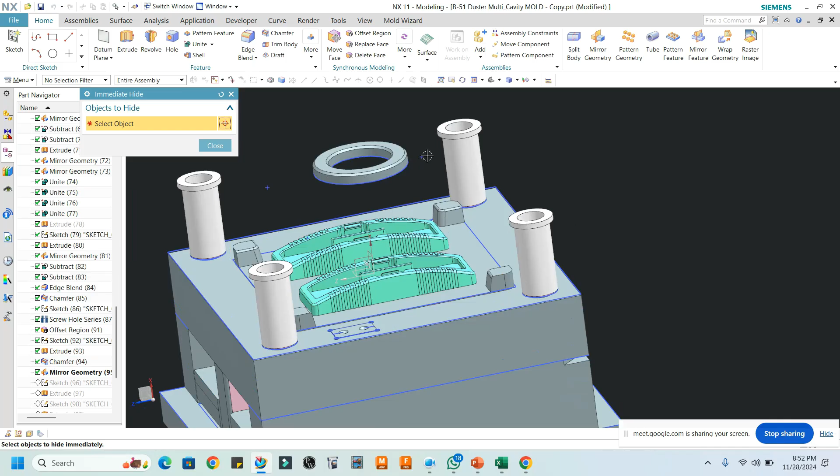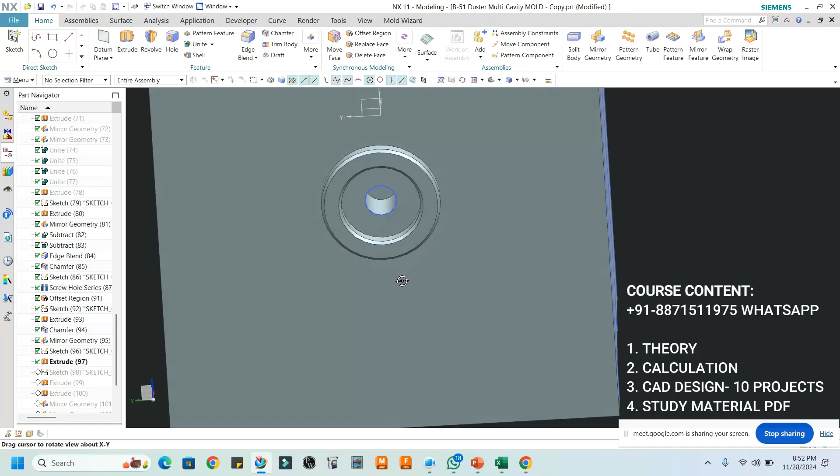To align the nozzle of the machine with the sprue bush, right? Okay. And now what is this? At the back side I'm using a locating ring again, and here this is the center hole. So what is this? Tell me.

Tell me. Which one, sir? This. Backplate. Okay, so here this is the back plate, I know, but I am asking what is the purpose of this hole? So basically there is a shaft here, right? So this shaft will be attached with this back plate. So this shaft is responsible to provide the force to this plate, right?

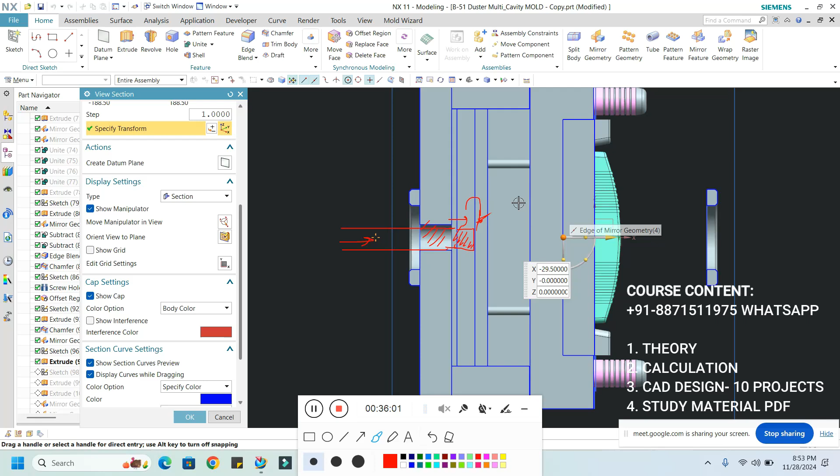And these two plates are responsible to eject the component, right? Already we provided the block, right? Both sides. So why do we need one at the center? One minute. Where is the block? Both ends. Yeah. This is providing the proper motion to the ejector grid.

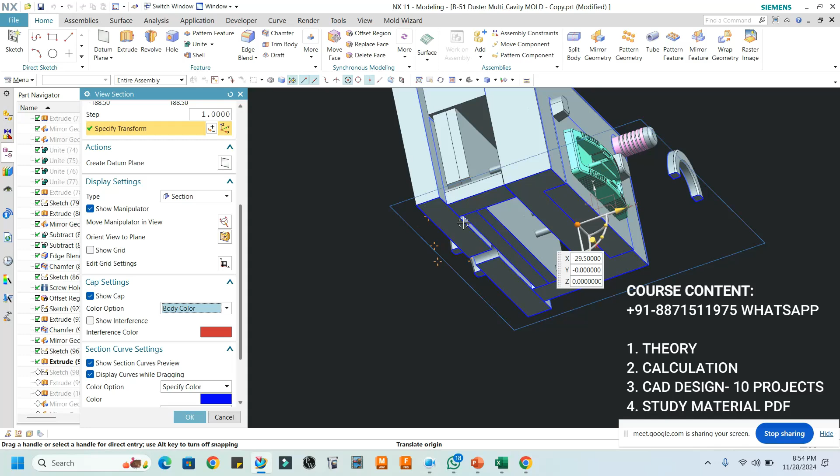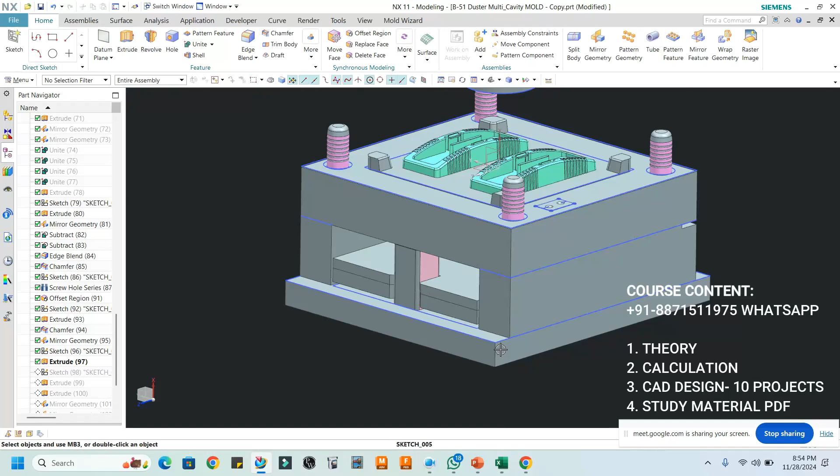See, there should not be deflection in this, because these two plates require support, right? That's why it is nothing but a support block. Okay, understood. So basically there is a fitment between this and this, which is H7 and j6, right? And this is the hole for the ejector, you can say the ejector rod.

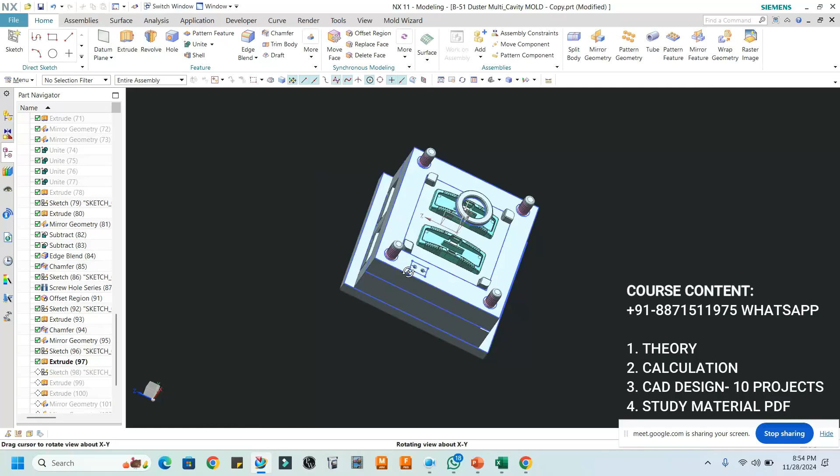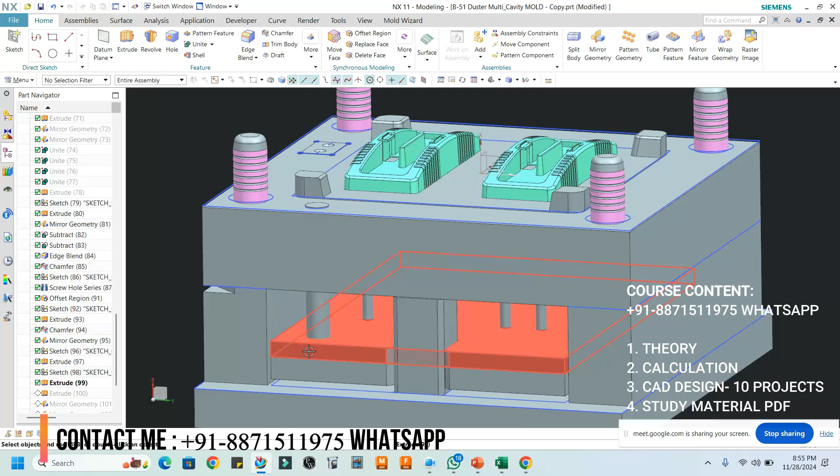So the ejector rod is connected with the ejector grid, and the ejector rod is part of the injection molding machine, understood? Yes, sir. Okay, now again tell me, what is this? Another pin, which is connected with the ejector grid, it also has a collar.

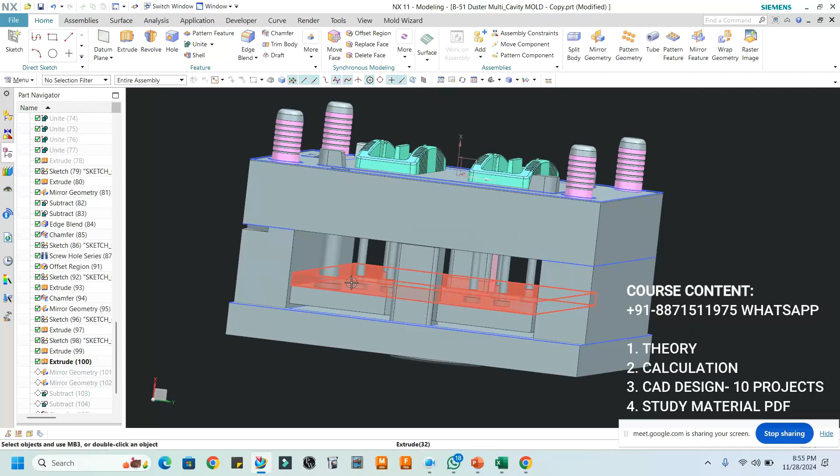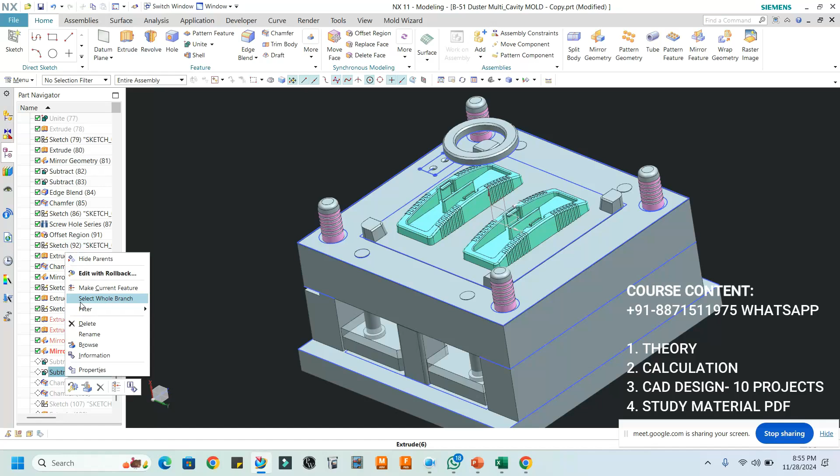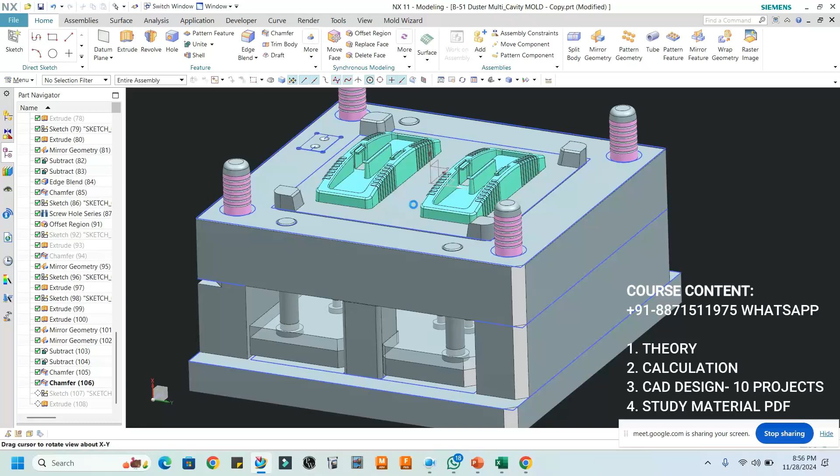Take the chamfer. See. So this is nothing but the multi-cavity. This is a simple type of component, there is no complexity in it. This is a flat parting line surface component, so you can easily prepare a multi-cavity mold for this type of component. Is it clear? Yes, sir.

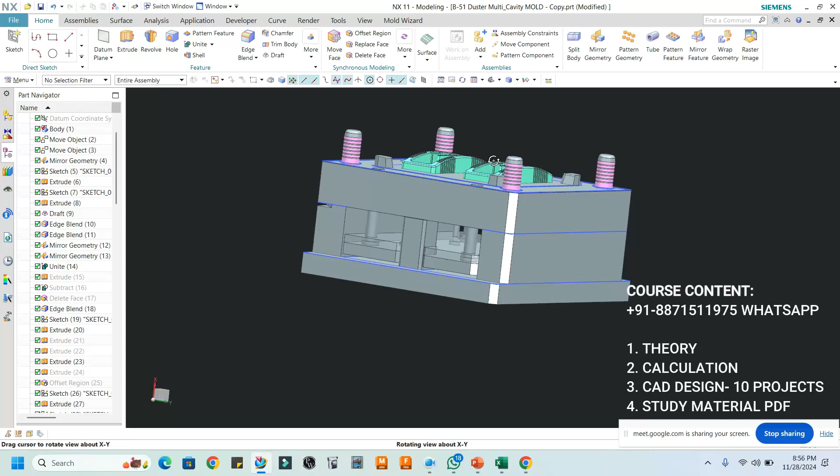So in this multi-cavity mold, I have covered the complete mold base components, including the core and cavity inserts, the return pin, support block, ejector plate, ejector back plate, guide pillar, the guide bush, right? Everything I have covered. So you can prepare the multi-cavity mold right now, with the complete calculation.

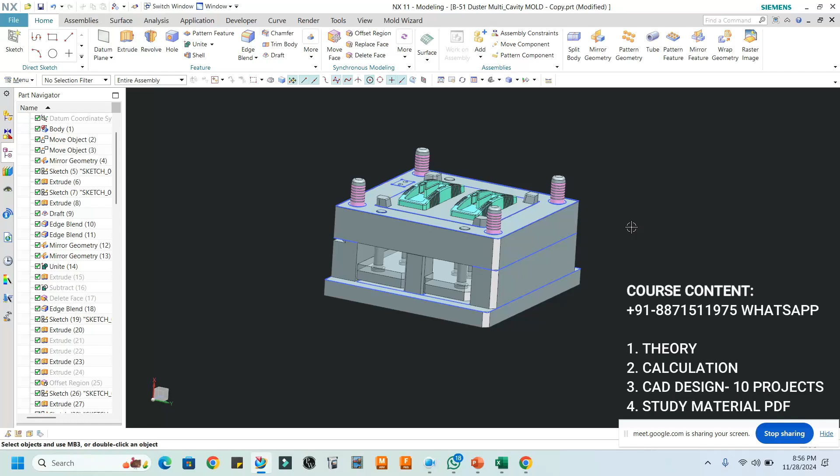Is it clear? Now one more thing: for example, if you have prepared the complete mold, after the trial you will get your component in physical form, right? Or the customer says, sir, there is a defect in this component. Because of that type of defect, sometimes we have to use air vents. So what is the air vent? Tell me first. It releases the hot air inside the cavity.

We have discussed the molding defects also, right? Correct. So here, void defect in the plastic molding process. For example, this is the material. If we are filling the material into the impression, because of the trapped air there is a defect which is known as voids. Voids occur during cooling while the part is inside or outside the mold.

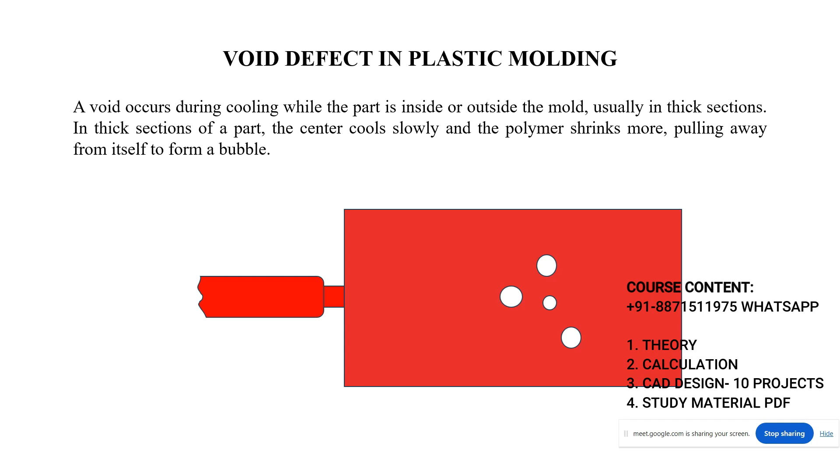Right? Usually on the thickest section of the part. Voids will occur on the thickest section of the part, right? Is it clear? Okay, see, these are the voids. Bubbles, you can say. See.

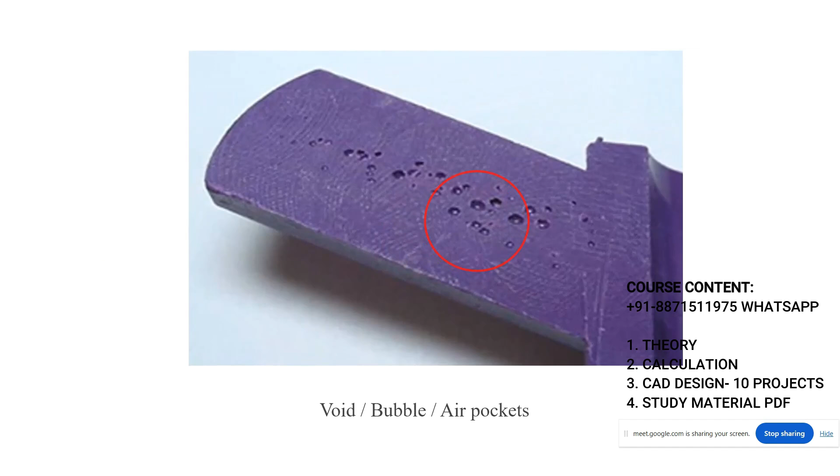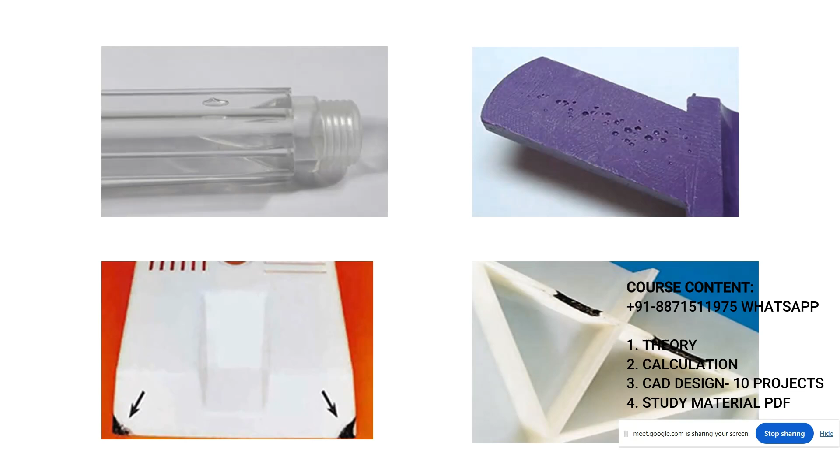Okay, so this type of defect can occur in the component. Okay, this is the burn mark. So burn mark, okay, because of the trapped air, this is one of the molding defects. Okay, it can be produced by the trapped air, burn mark.

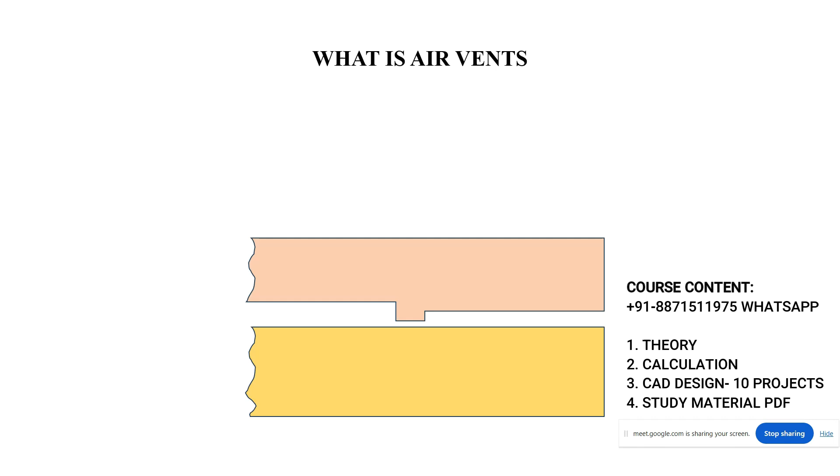What is the air vent? So air vent is nothing but the space in the cavity section, right? So generally if we are designing the air vent in the mold, basically we have to machine it into the cavity side. Okay. So basically, what is the purpose of air vent? To escape the air from the mold. Is it clear? Yes. Which is produced by the molten plastic.

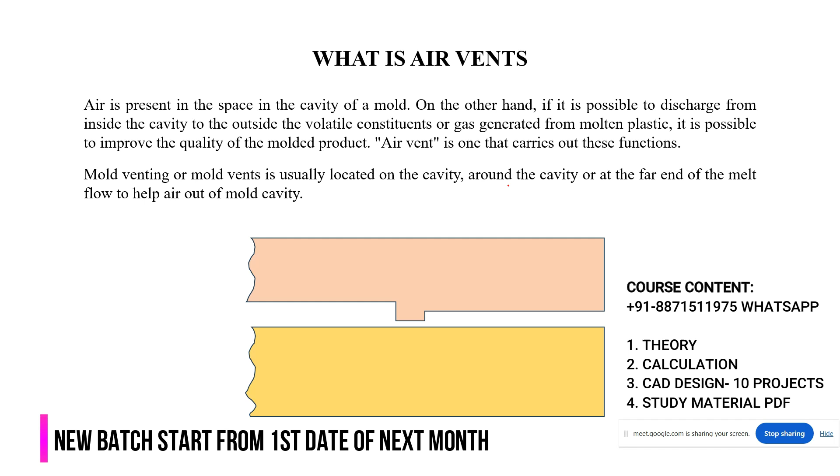Okay. So mold venting or the mold vent is usually located on the cavity side. As I told you, this is a very important point. At the cavity side. Is it clear? And around the cavity or at the far end of the melt flow to help air out of the mold cavity. Is it clear? See here. For example, this is the gate. So it should be away from the gate, or at the opposite side.

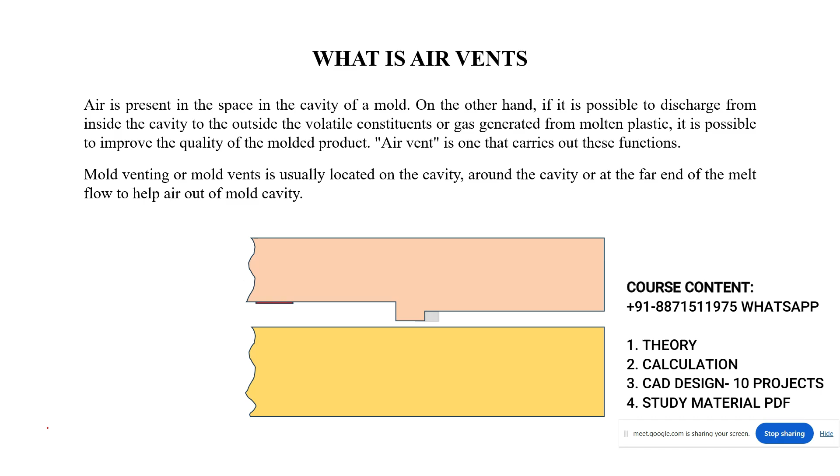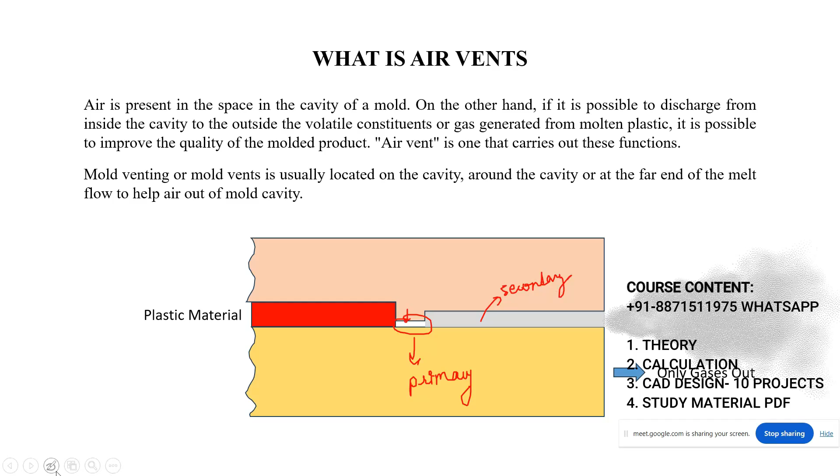Okay. So here you can see that. For example, what is this? This white portion is the primary vent. Or here this is the secondary vent. Is it clear? See, why do we need air vent again? To avoid voids and burn marks on the molded component, and for a quality plastic part we need air vent. Okay, here see the basic parameters of the air vent.

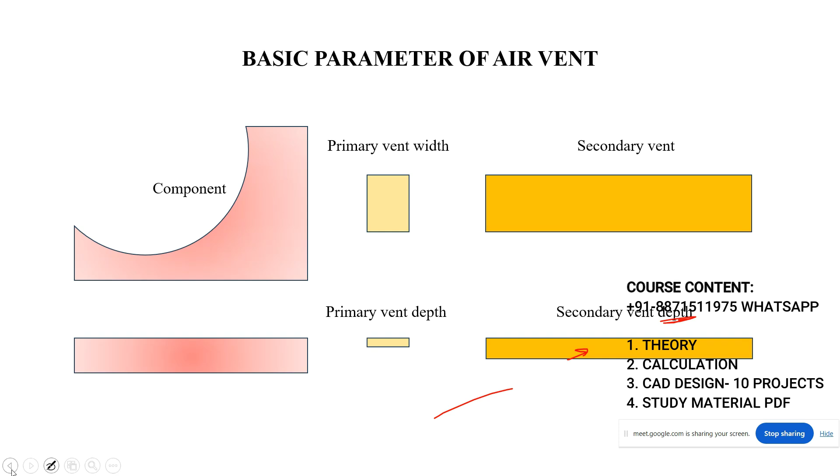How to design? See, this is the component here. This is the top view, or this is the section view, or the side view, you can say that. Section view you can consider. See here, this is the primary vent width. This is the primary vent depth. This is the secondary vent. Here this diagram is showing the depth. Is it clear? Just combine this portion.

So usually we can take a width of the primary vent around 2 to 5 mm. And if I'm talking about the depth of the primary vent, we can take 2 micron to 20 micron, but usually it depends upon the plastic material which we are using for the component, right? And if I am talking about the plastic material, what is the meaning of that? Property of the plastic, right? Understood?

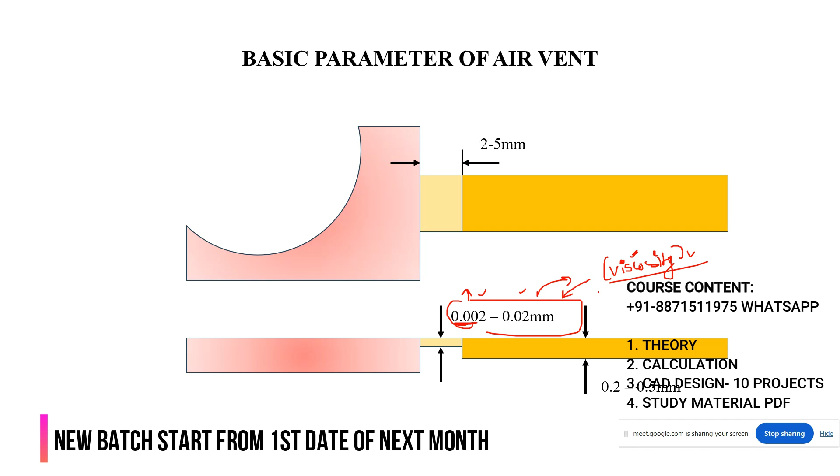So in the previous lecture, when we were discussing the runner or the gate, what property did we cover at that time? Viscosity. Right or wrong? Vijay, viscosity we have covered, right? So this is the main property. Depending upon that, we have to choose the primary vent depth. Understood? For the secondary vent, I can take 0.2 to 0.5 mm.

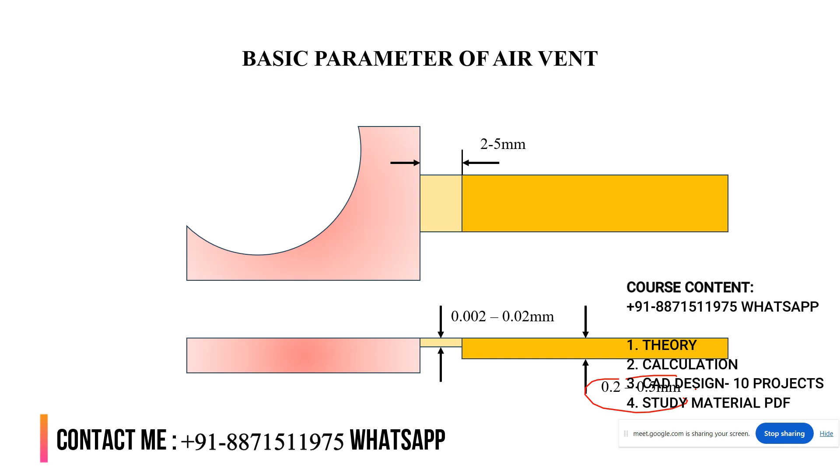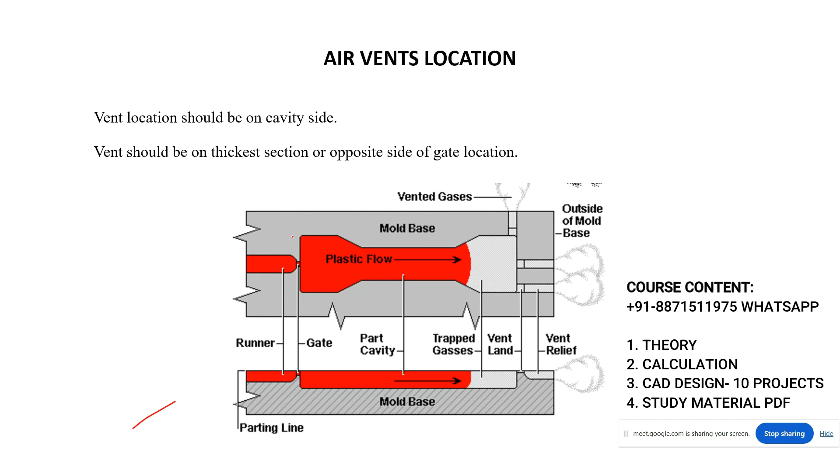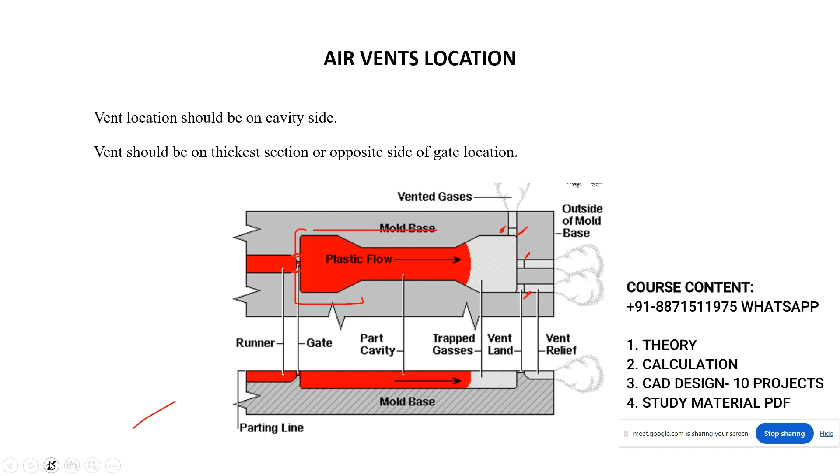Okay. Now see here. The vent location should be on the cavity side again. Again I am telling you, the vent should be on the thickest section or the opposite side of the gate location. Is it clear? Always. For example, this is the component we have. Here you can see that this is the gate location, and here this is the vent. This is the vent. It should always be on the opposite side. Is it clear?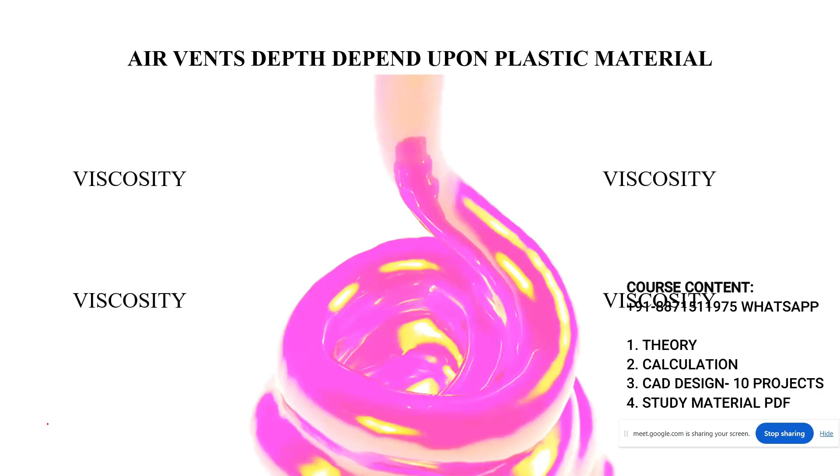The air vent depth depends upon the plastic material. If I'm taking the air vent depth, what is the meaning of air vent depth? Basically I'm selecting the depth for the primary vent. Is it clear? So it depends upon the viscosity, as I told you. Basically we have to deal with only the primary vent. Secondary vent we can take 0.2 to 0.5 mm, meaning 200 micron to 500 micron. But we have to select only the primary vent depth. Understood or not?

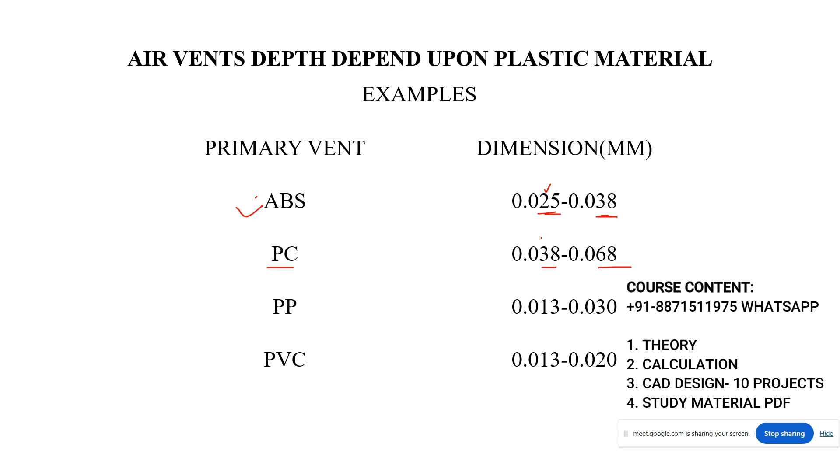See, dimension, primary vent. For ABS, just for an example, I can take 25 to 38 micron for the primary vent. How much? 25 to 38 micron. For PC, I can take 38 to 68 micron, means 40 to 70 micron. Is it clear? For PP material, I can take 13 to 30 micron. Or for PVC, I can take 13 to 20. It also depends upon some other properties of the material, right? You understood or not?

Just for an example, the customer said that we will use PP material in the mold. But we have prepared the mold based on PC material. So what defect can be produced there? Tell me.

Tell me. Just for an example, if customer says that sir, we are using PC material for making the component. Okay, so instead of the PC material, they are using PP material. Then what defect can be produced because of this change? Tell me.

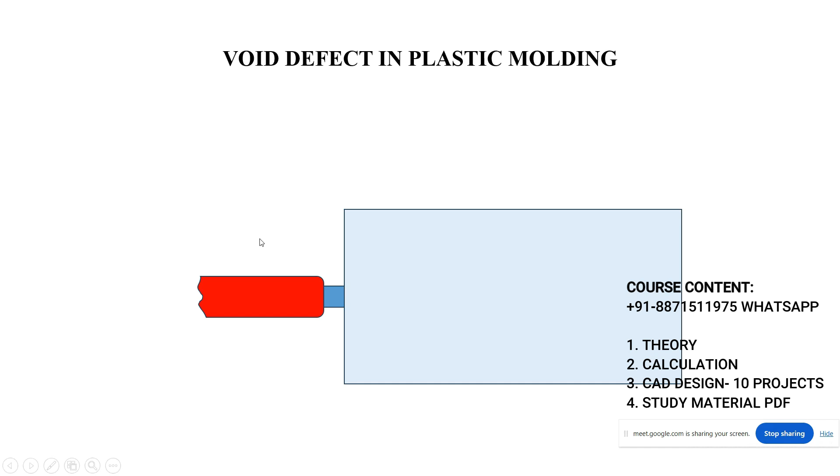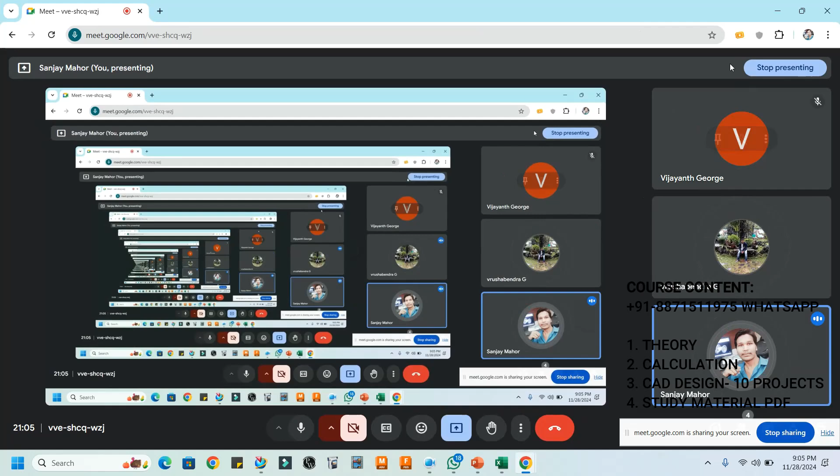Vijay. Vijay, tell me. Varush. My voice clear or not? Varush and Vijay, my voice is clear or not? Tell me. Vijay. Varush, my voice is clear? Yes, sir. Okay, what I'm asking? Sorry, actually I lost internet, so that's why.

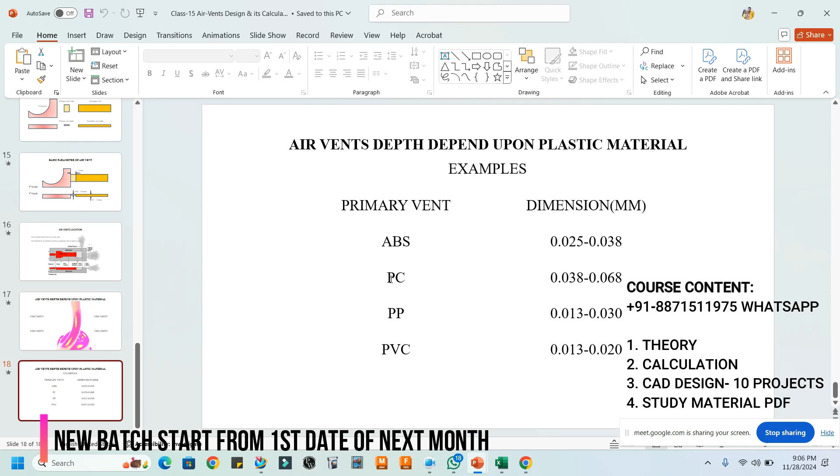Okay. For example, I have a PC material, right? And I have PP material also. A customer said that, sir, we will use the PC material for making the component. But instead of the PC material, they are using PP material. Then, because of this change, what will happen there? Tell me. There will be a dimension. No. Sorry, I didn't get it.

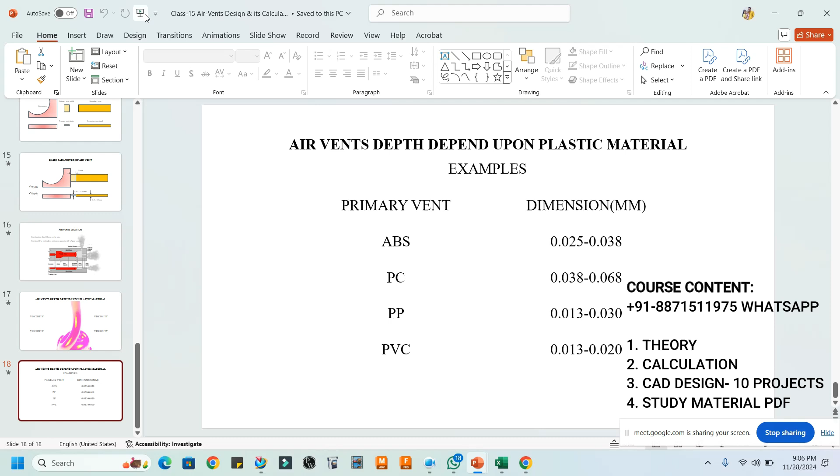See, for example, primary vent for the PC is the 38 to 68. So basically, we have prepared the mold depending upon the PC material, right or wrong? Yes. Okay. So we have designed the air vent around 50 micron for the primary vent. But instead of the PC, customer use PP material. So what is the meaning of that? If they are using PP material and PP required 13 to 30 micron air vent, and we have provided the 50 micron.

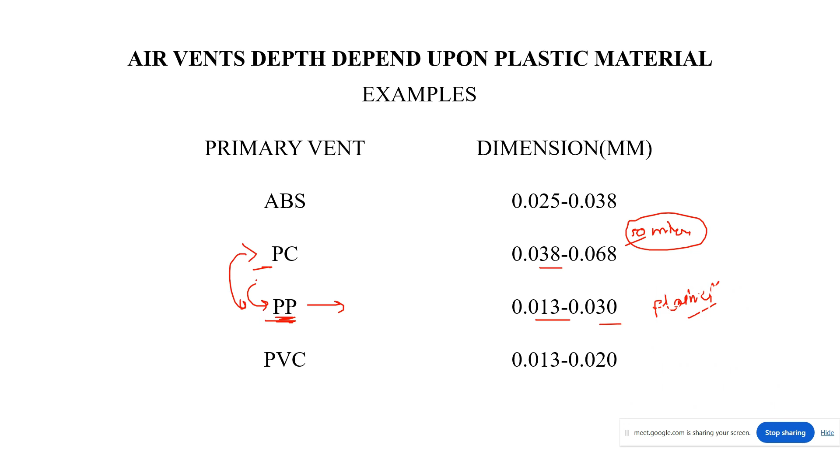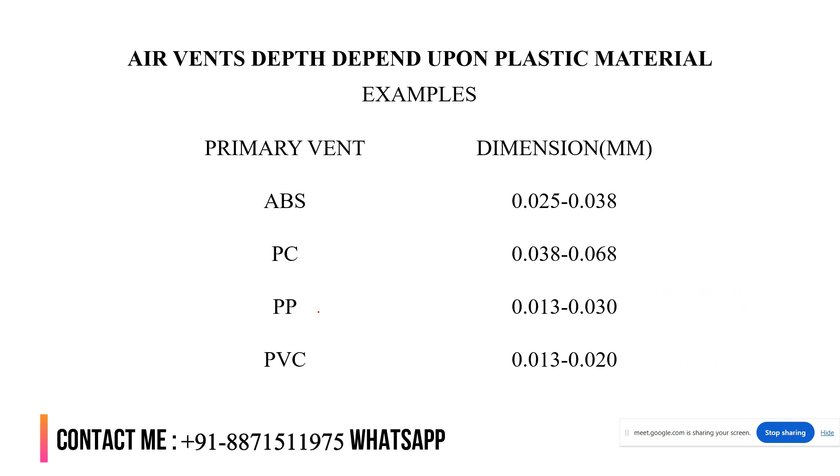So what is the meaning of that? Flashes will be there. Definitely. Flashes will be there, right? So because of the material change, there will be the defect. Understood? Yes. Okay, so that's why we have to choose the air vent depth depending upon the material. Or that's why in first or second lecture we have discussed that we should ask few questions to the customer before designing the mold. Is it clear? Yes. So this is very important. Is it clear? Okay.

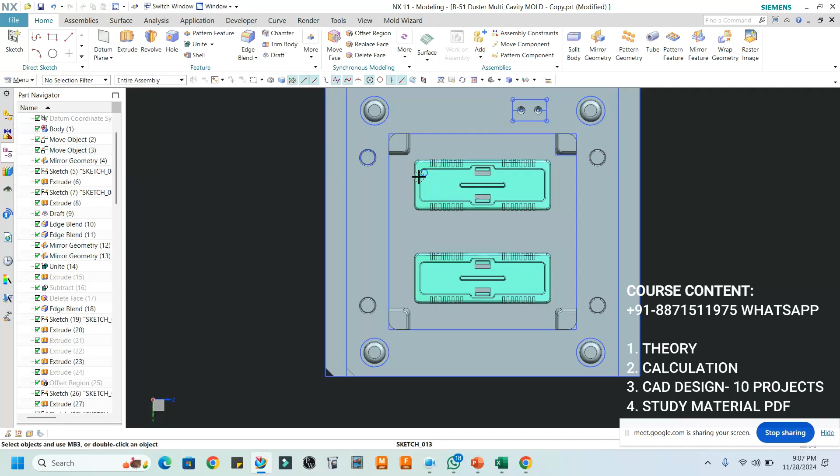So now for example, we have a component here. Okay, so where will be the gate location? See, this will be the gate location, right? This and this, right? This will be the gate location, and for these two components, we have to use fan gate. Okay, so where we can use the air vent? At this position, at this position, and at this position, right? Yes, sir.

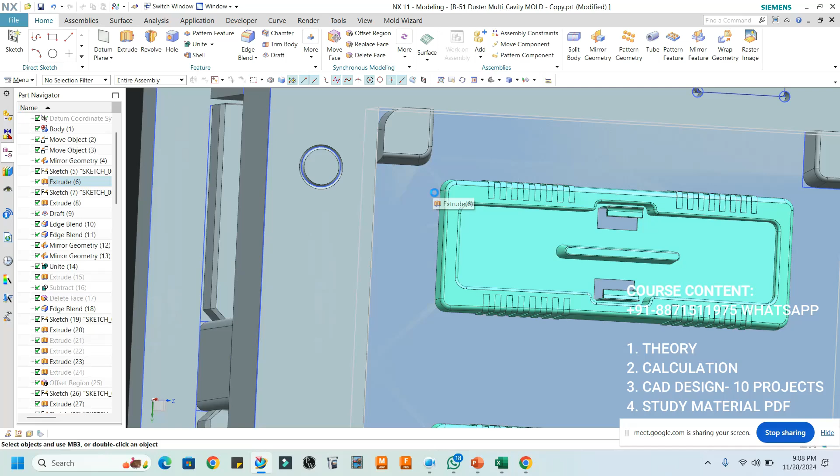Okay, so why don't we select the corner here? Why don't we select at the corner, sir? At this corner. Yes, sir. We can use, but there is a difficulty of machining, right? Right. Oh, okay, got it. Yeah. So we can use. So basically, we have to design the air vent here. Is it clear? Yes. So we can design.

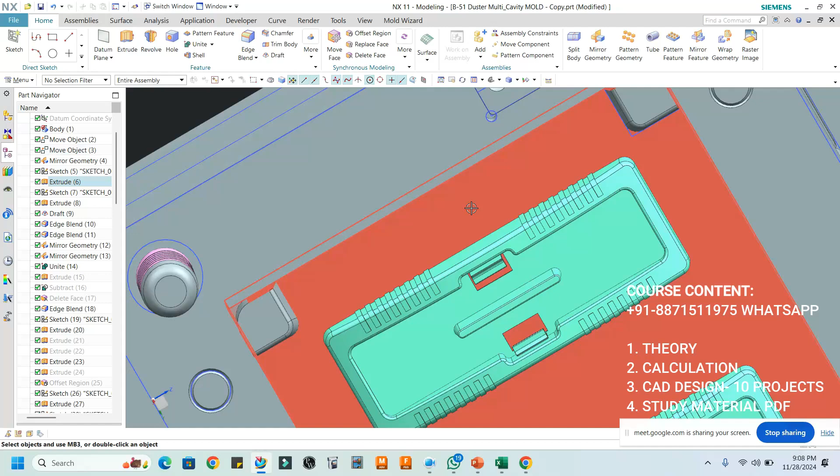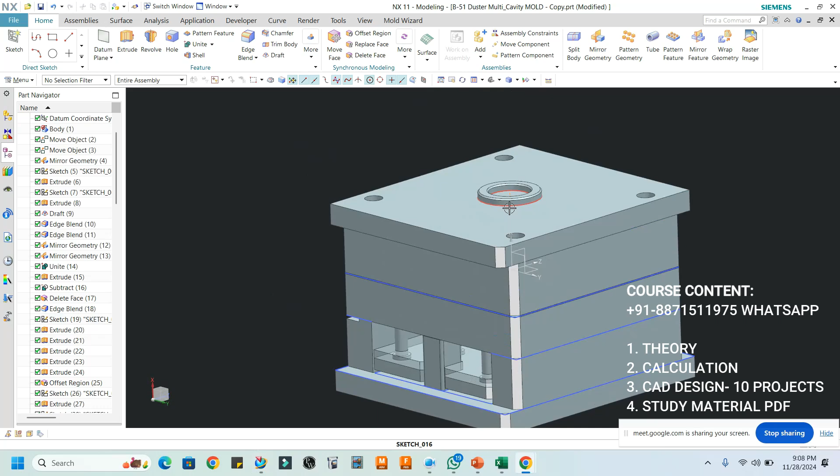Okay. So for example, material is PP. So basically, primary vent we can take 20 micron. 20 micron, but it should be at cavity side. Okay, so still I have not prepared the core and cavity right now. So basically I have just prepared the complete mold base. Is it clear? Yes, sir. Okay, so here in this lecture we have covered the complete mold base with the guide pillar and the guide bush and the air vents.

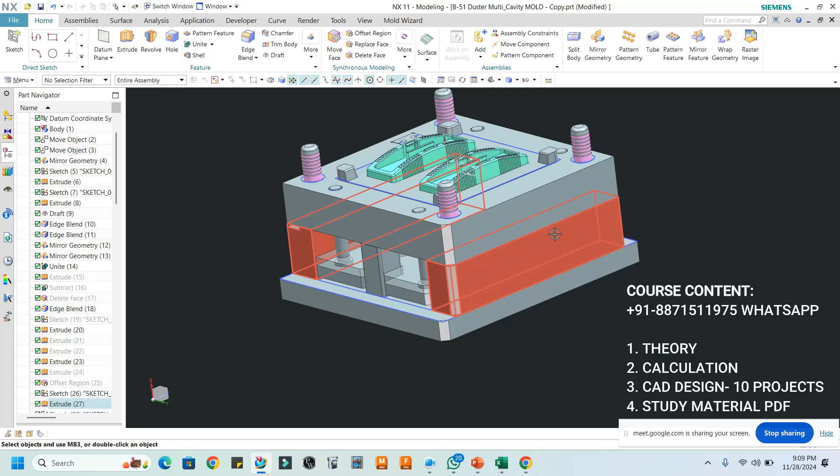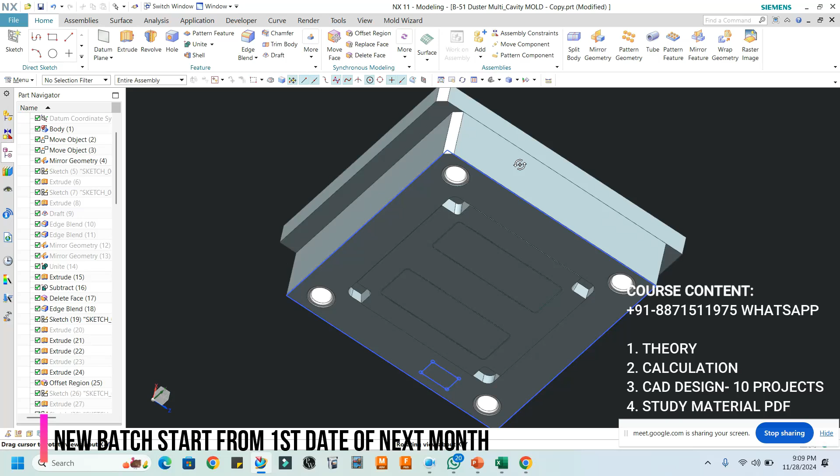So once you complete the multi-cavity mold design, this is your homework that you have to provide the air vent and you have to design the complete mold, because I have not designed it completely right now. Just for example, here you can see that this is the only one pressure pad here. So you have to provide the pressure pad here, here, and here also, right? Understood? Yes, sir. And you have to prepare the core and cavity also. And after the complete design of the runner, you have to provide complete things of the core and cavity. Understood?